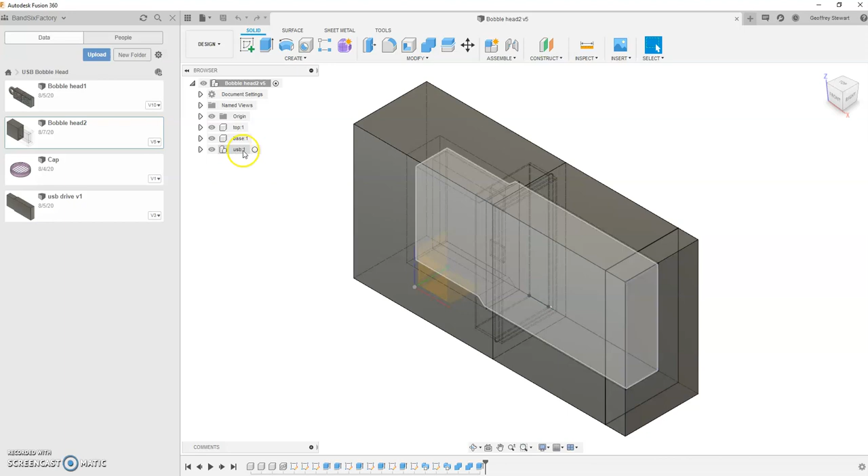So this is something I drew, so hopefully you guys are going to do something similar. I have the USB here, which is a sample I've already made, and you can download that off Lampada.

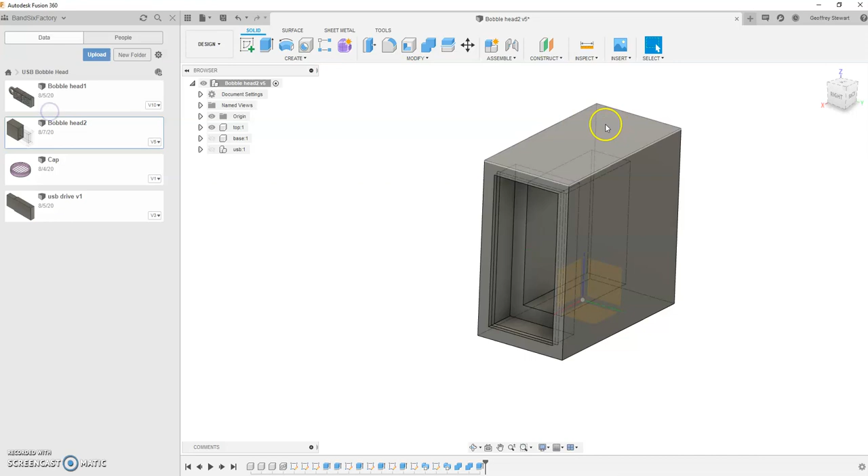Then I'm going to get you guys to design a base or a top, something like this, which is going to have a little recess in the lid, and we're going to make the base. It's going to have a little notch there at the top, so we'll make a little clicky lid.

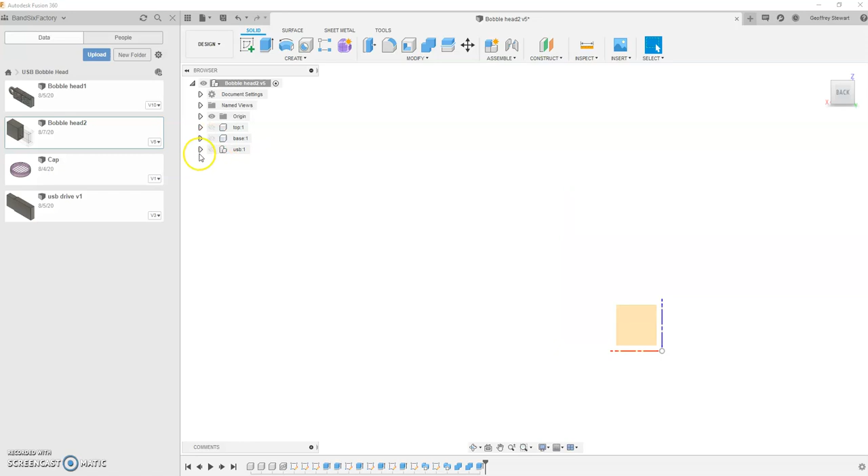Okay, so what we need to do, I'll start again. Okay guys, we're going to create a new design here, so I'll just go up here and we're going to create a new project.

So if I go back to the home, I have here all my projects here. I'll create a new project and let's call it USB.

Now for some of you guys, you might want to start designing your designs from the start. For most of you guys, you want to download off Lampada the USB drive.

So I'm just going to copy it from my other file here. If I go to USB drive, I'll just hit copy, and I want to paste it into here. And it's going to copy it across into that.

So if I go back home into USB, I have my USB drive. So I'll just drag that out onto the desktop there. Oh, I've got to first of all save it - just save it as USB stick. Once that's saved, I'll drag that out.

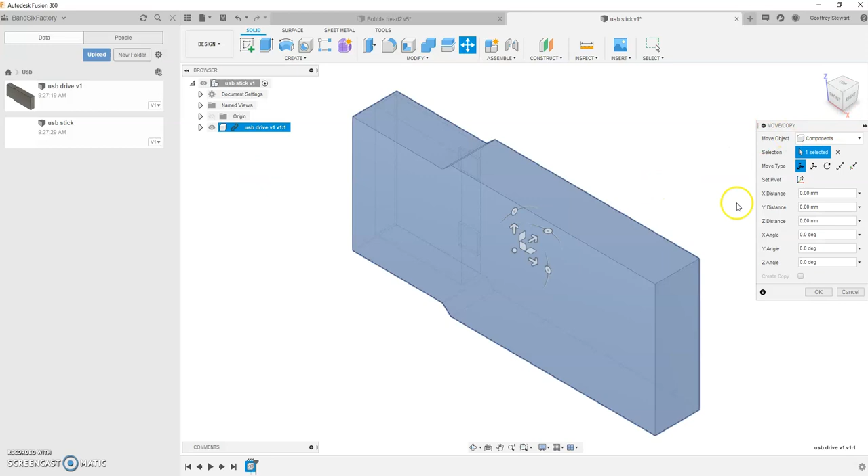Okay, now what we want to do is actually start to draw our base and our top around. So first thing I'm going to do is create some new components here - this will be our top, and this one will be our base. Okay, so I'll start working from the base to start off with.

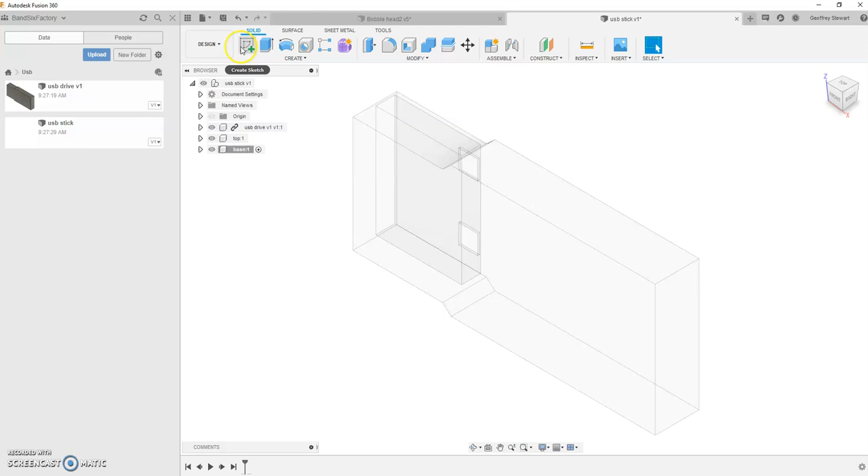Okay, so I might just start with a new sketch. Create a sketch on, I'm going to select that plane there. And I'm just going to start out by drawing two rectangles.

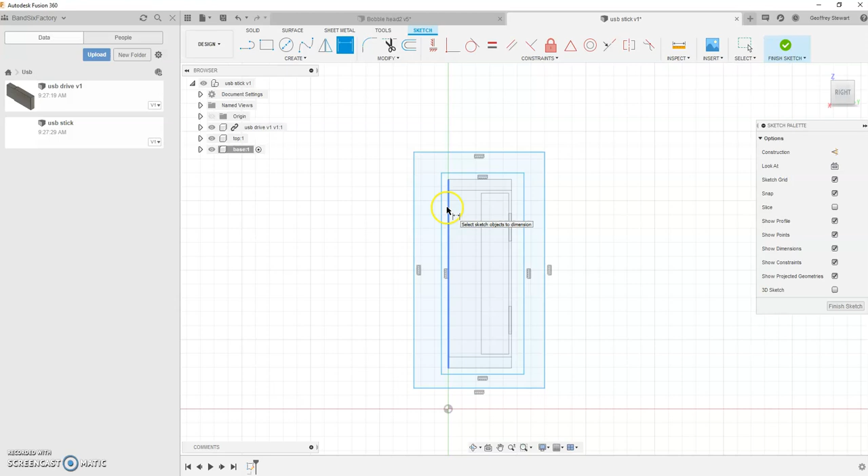Now we have to actually offset that from the USB, because what's going to happen is if we print this USB case out, we need to have some sort of tolerance in there. Otherwise we're going to get some errors when we try to print it out, because it won't fit the USB in there. So I'm just going to quickly go around and just do 0.1 on each one of these.

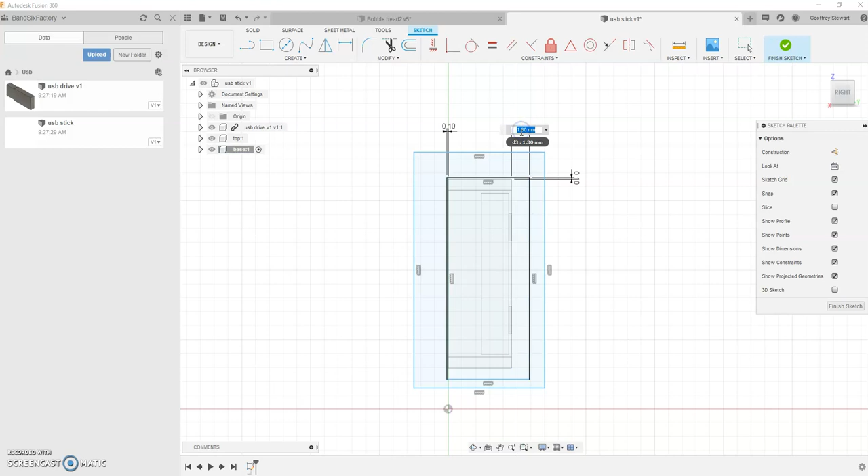Next thing, we might make a space for the next part of it. From there to there, we might make a 3mm gap all the way around.

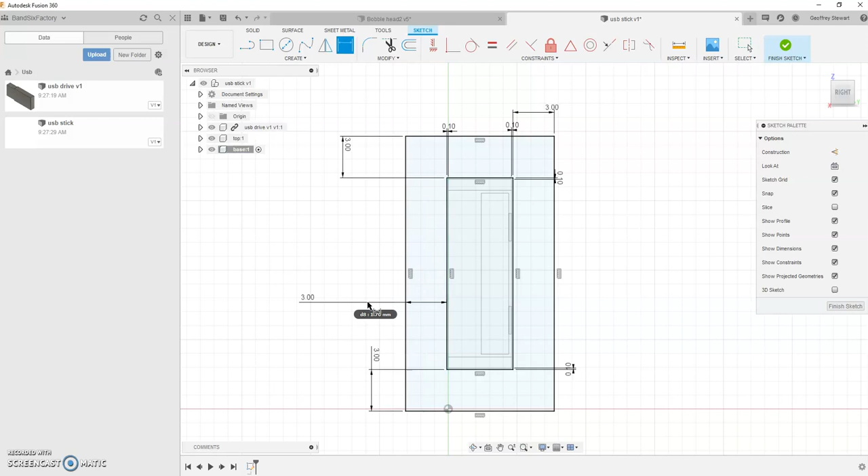Okay, finish that sketch. Now we can sort of see that we actually have a bit of an offset here. Okay, I'll just hit in the top right corner there, and we can start to extrude that part out.

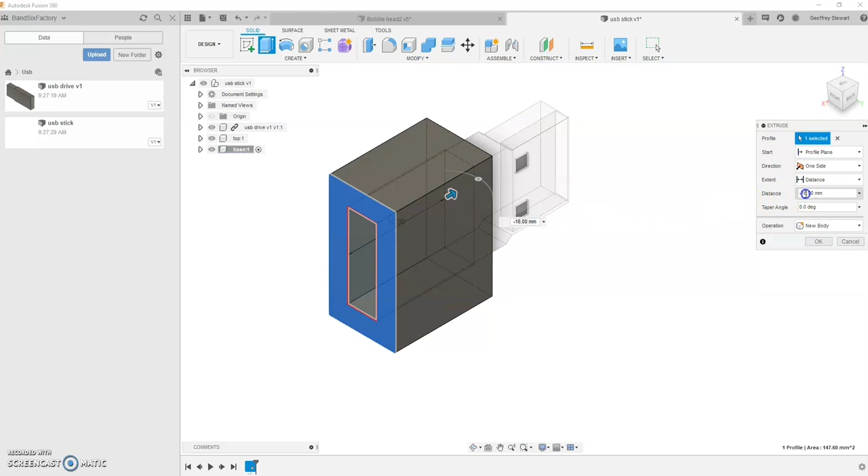So I'll select that, and I'm going to extrude it up 18mm, because we need a little bit of a gap at the top to create our recessed and our clicky lid bit.

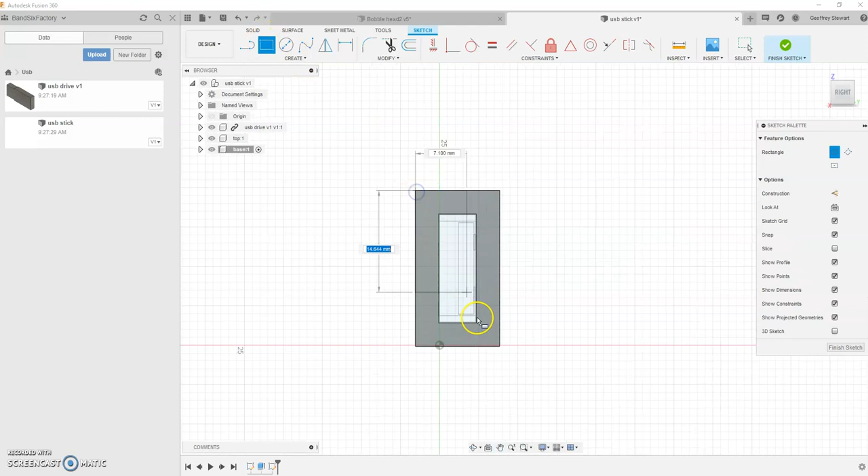Next thing, what I'll do, I'll create a new sketch on this plane here, and I'm just going to use the rectangle tool to drag around like that. Finish that sketch, and we'll extrude that face.

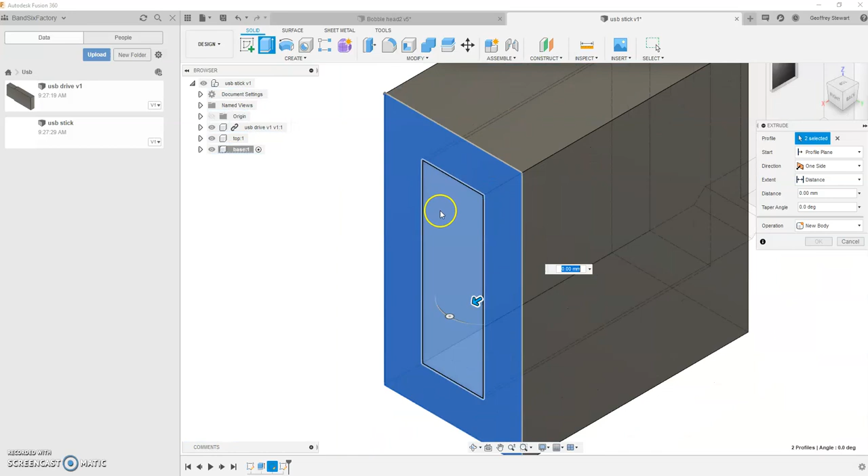Sketch, extrude, sorry. So we can extrude that out. We'll extrude that out 3 millimeters.

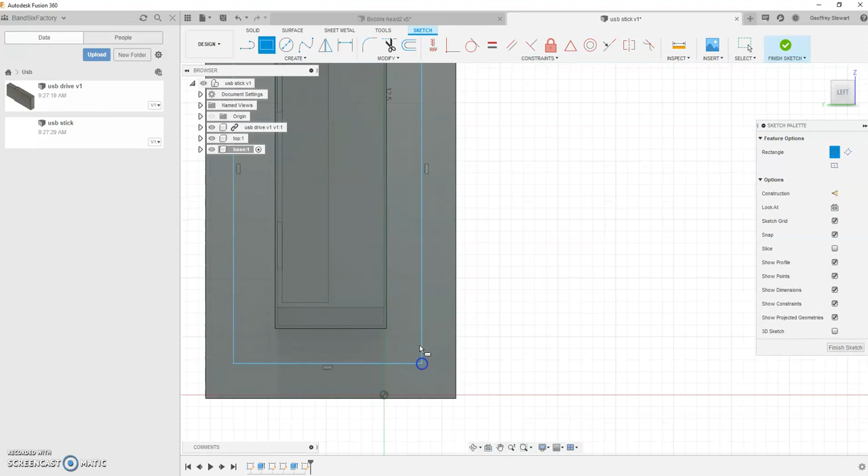Next thing I want to do is create a new sketch on the top surface here. And I'll create a little rectangle somewhere around that part there, and another one over here.

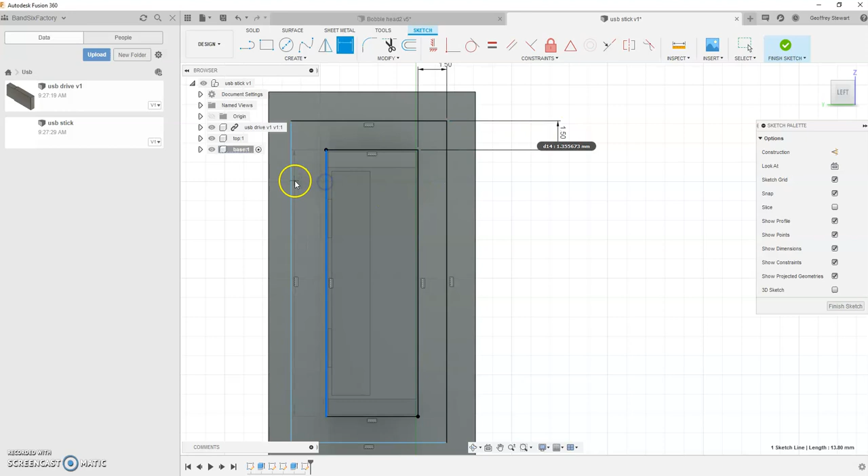Okay, and we'll just give that - we've made that dimension between there and there 3 millimeters, so we'll just make it 1.5 millimeters on each one. Finish that sketch.

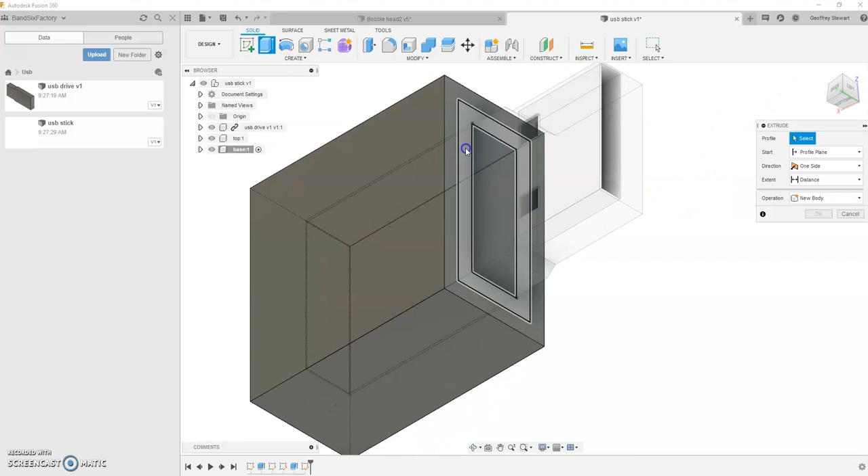And what we'll do, extrude that out now. And we're going to come out and say 4 millimeters.

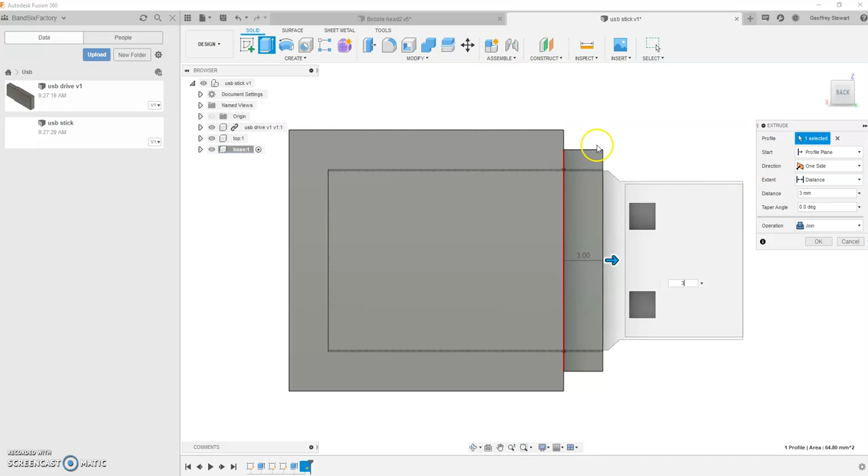Actually 3 millimeters, sorry, because we don't want it to go too far past that. So when we stick it into the USB, into the computer, we want that bit not to go too far forward.

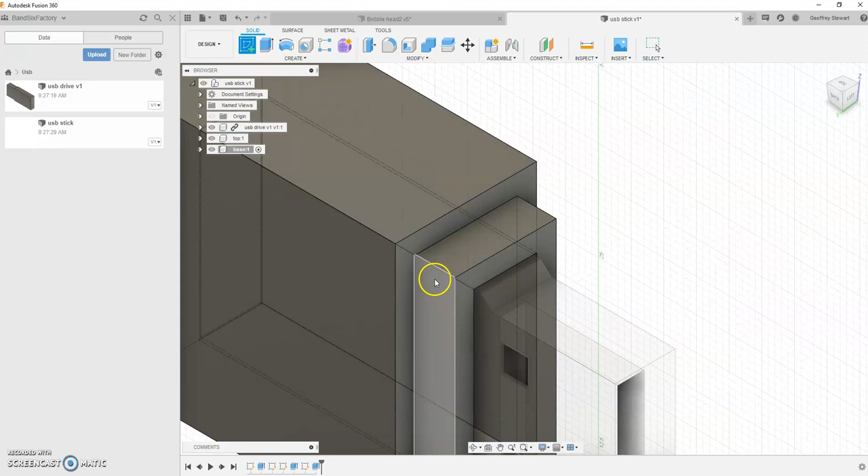Okay, I think that's getting pretty good. Next thing, we want to do a sweep around the next part. So we'll create another sketch on this surface here, right here, and I'm going to draw a little shape. We'll just create a little arc, a 3-point arc.

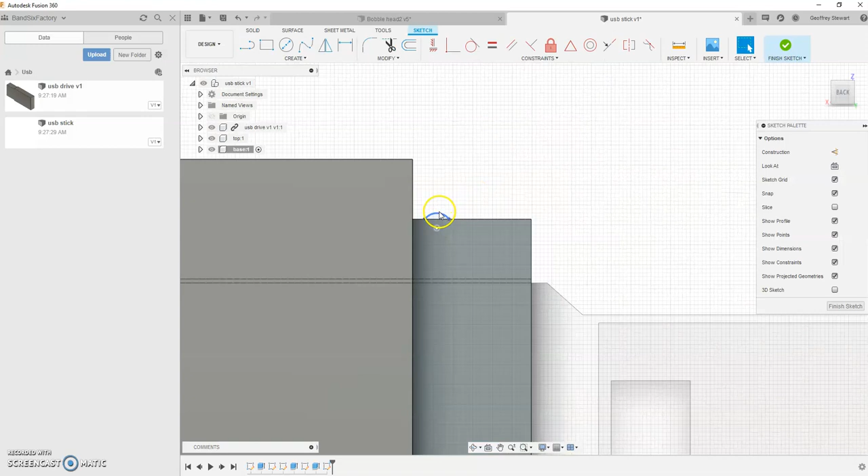Okay, so what we want to do, if we have a look at the arc, we want to go back in to check that sketch out. So I'm just going to go back and edit the sketch. If we look at that, what we actually want to have is something that's about 0.2 of a millimeter high. Now these graduations here are 0.1, 0.2, it's about 0.3 high. And we can see here it's about 0.6 long.

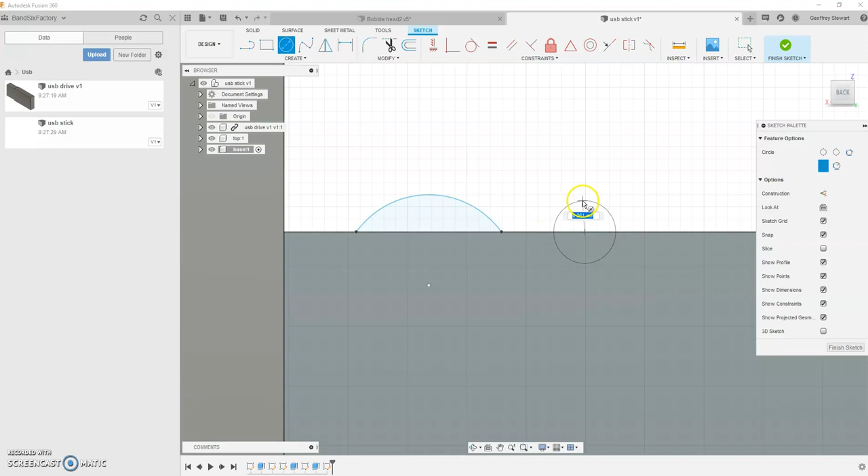Okay, now one way we can do that is just drawing a little circle like that, and see I've got it, that's actually 0.3 high at the moment.

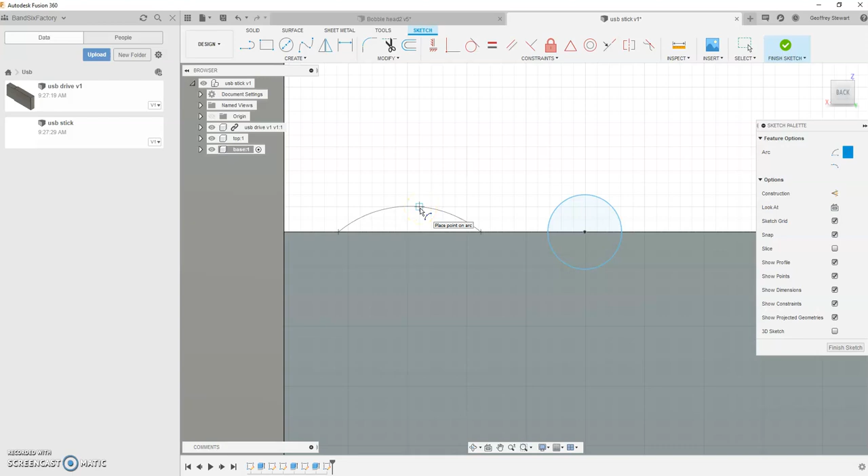So I want to redo that arc to make sure it's only 0.2 high. I'm just going to delete that and try another arc, a 3-point arc, somewhere like this, and go to about 0.2. Now the good thing about doing it at 0.2 is because when you 3D print it, the printer will actually do that. If you do it at 0.1, it won't print at 0.1 millimeters, it'll just disregard the actual bump and not print it. So you just have to be careful about that.

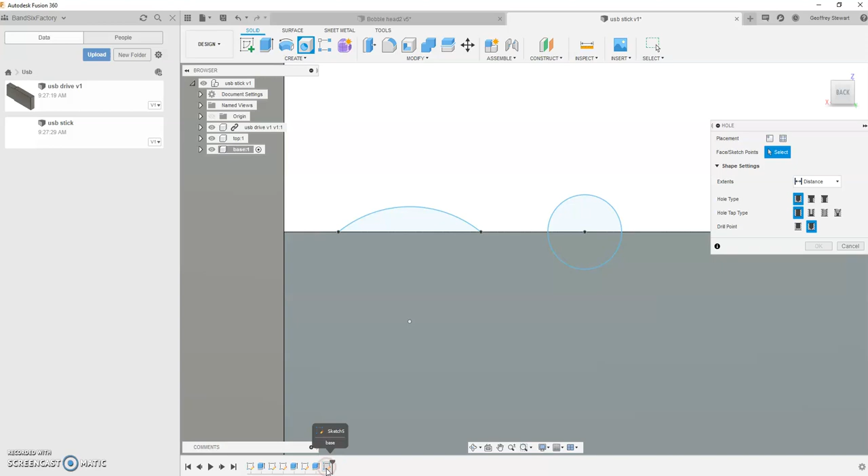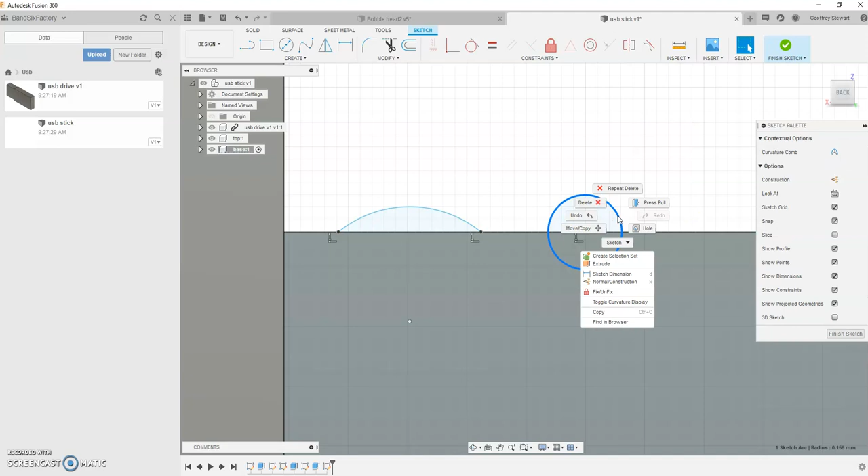Okay, I'm just going to delete that. Go back in and edit the sketch again. Go around and we're going to sweep that around.

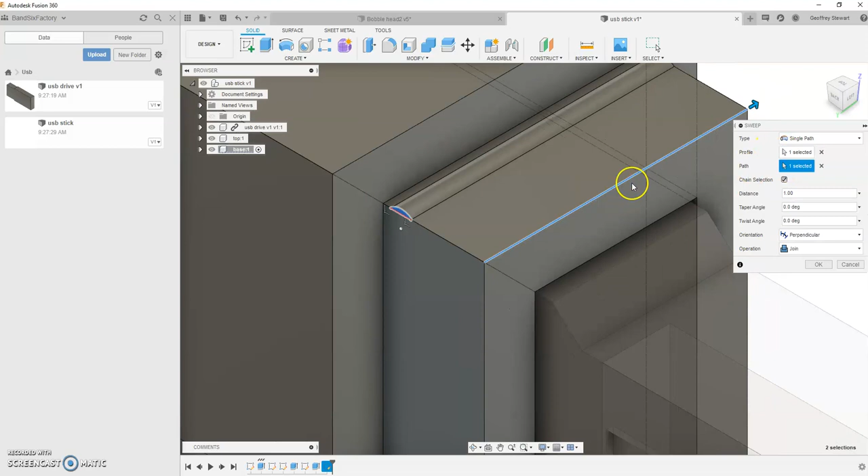Next thing we're going to do is create a sweep. So we're going to select that profile, and then select the path it's going to follow, and we'll just follow the path around the edge all the way around. And you click OK. Okay, so far that's like our base, pretty well done.

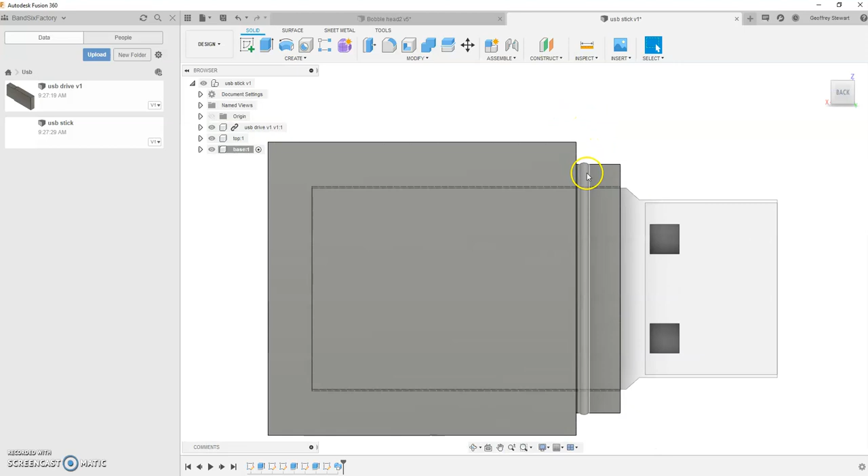Okay, the next part of this is to design the top part. But for you guys, I want to expand this and make this into your utility, so you can do whatever you like with the design of this.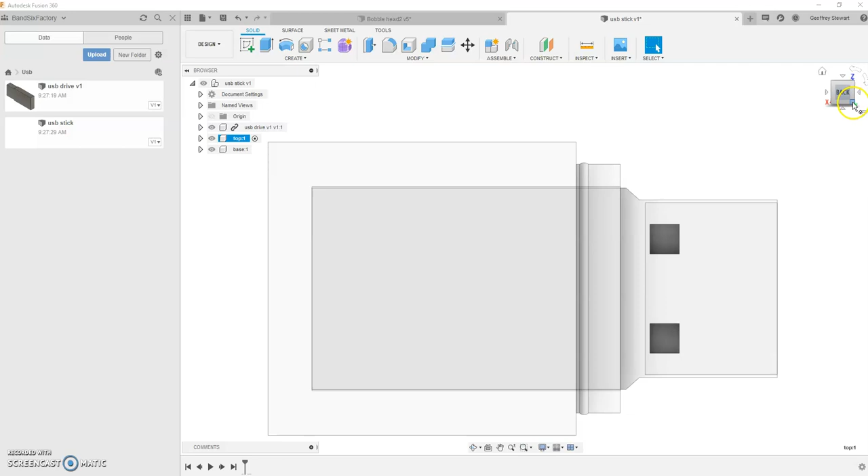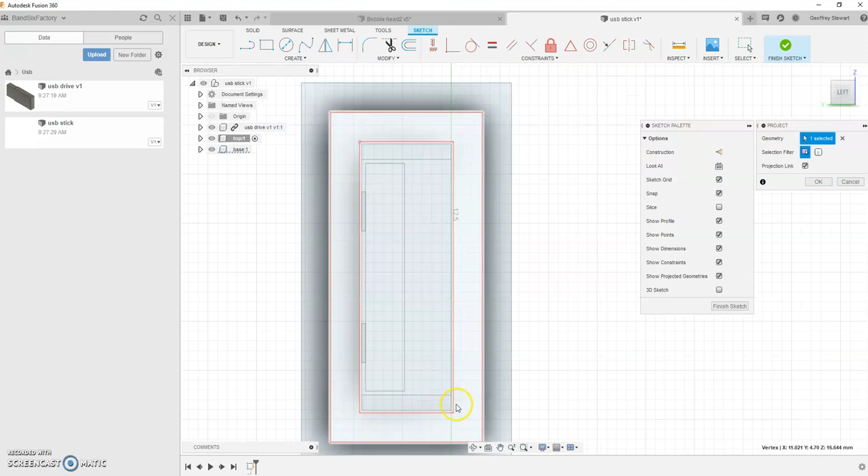Okay, so I'm just going to flick across to activate the top part of this. First of all, I'm going to select a surface to sketch off, which will be this surface here. And I'm going to do 2 rectangles. First rectangle, I'm going to hit the letter P to project. I'm going to project a little spot over there and this corner here. And I'm going to select the rectangle tool.

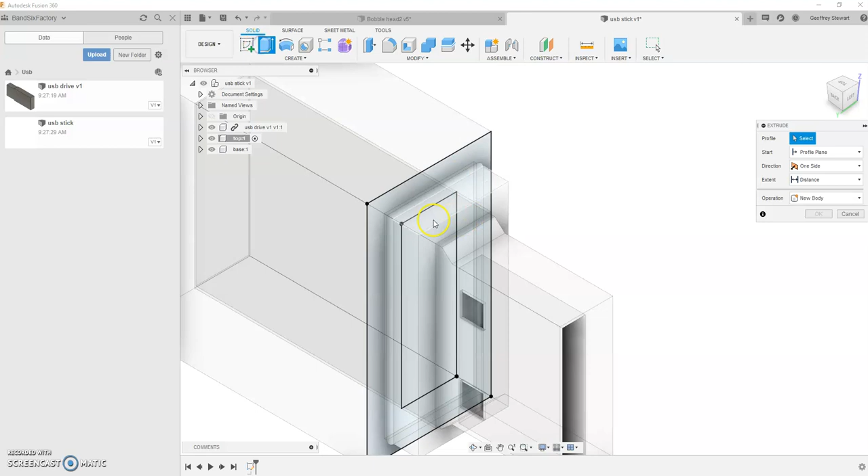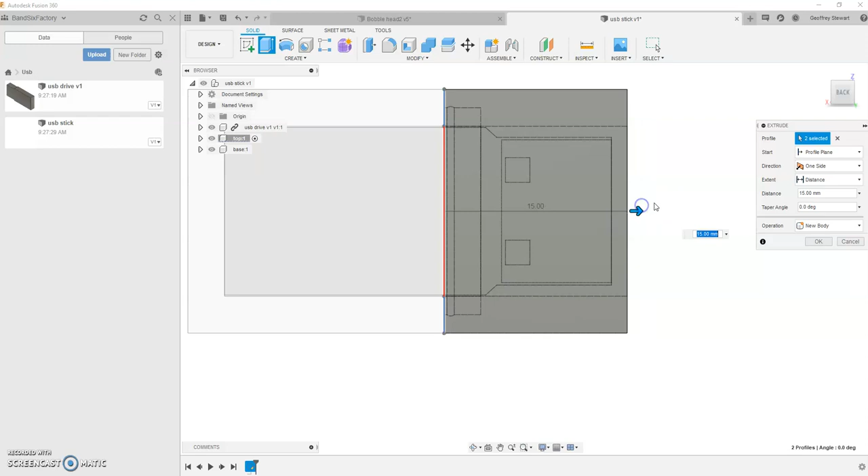Draw 1 rectangle, 2 rectangles, finish that sketch, and then I'm going to hit extrude. And I'll extrude that out, and see how far I need to go. So that's right to the very end of the USB, but we can go a little bit further. So 15 millimeters, and go OK.

Then we want to create a new sketch on this surface here. I'll just draw a rectangle from there to there. Finish that sketch and extrude that out by 3 millimeters.

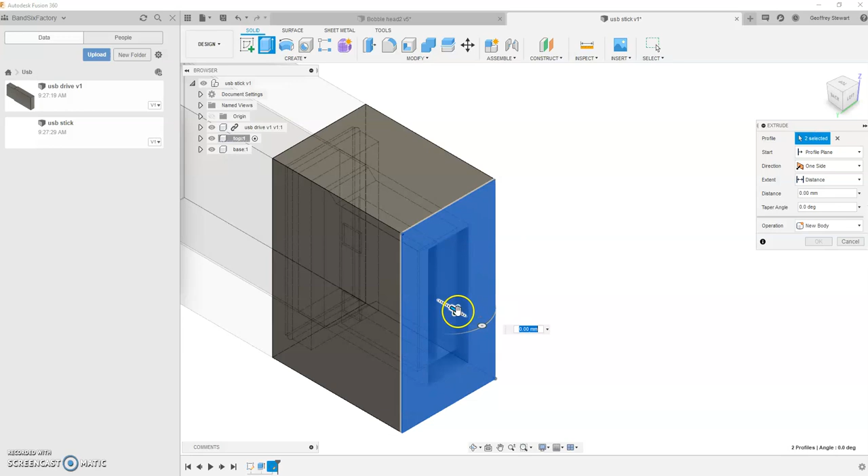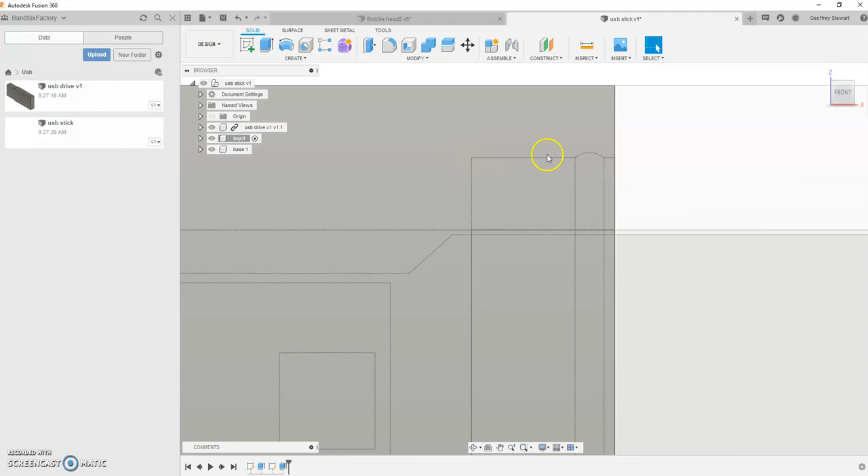Okay, now next thing we want to do is to design in here. We actually need to have this recessed part, but we also need to consider that when we 3D print it, it's not at a 0 tolerance. You need to leave a little bit of a gap there. So what I'm going to do is a sweep around that as a cutting sweep.

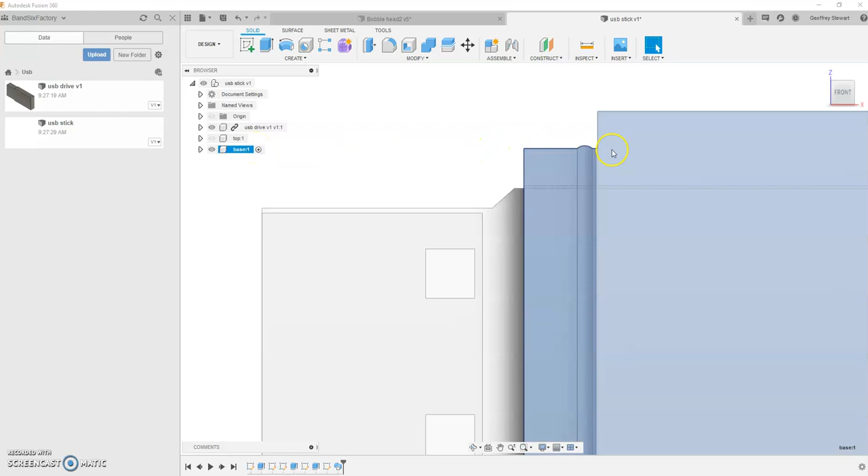So what I'll do is turn off the top and activate the base again. And I'm going to draw another shape here on this surface here. I'm going to create a shape here. I'm just going to draw a line.

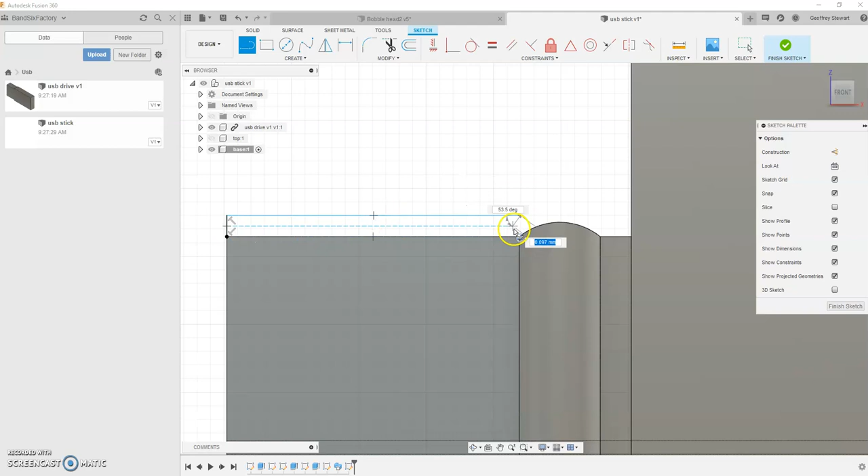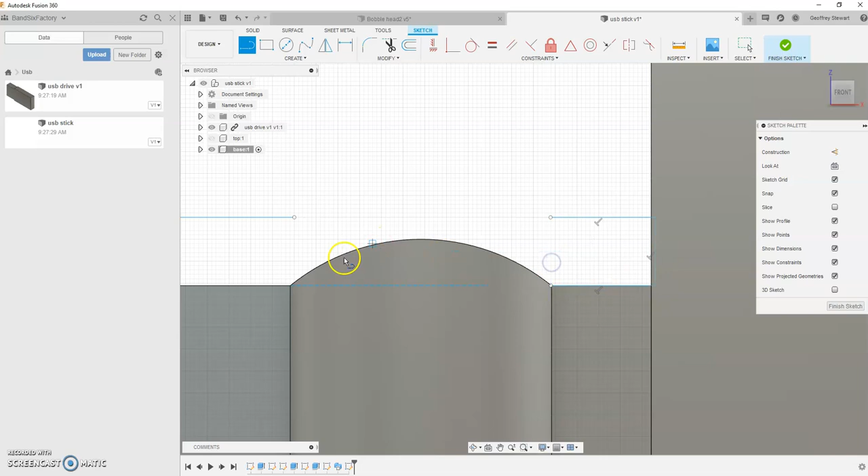Another line from, let's just draw it out here. I'll draw an arc again.

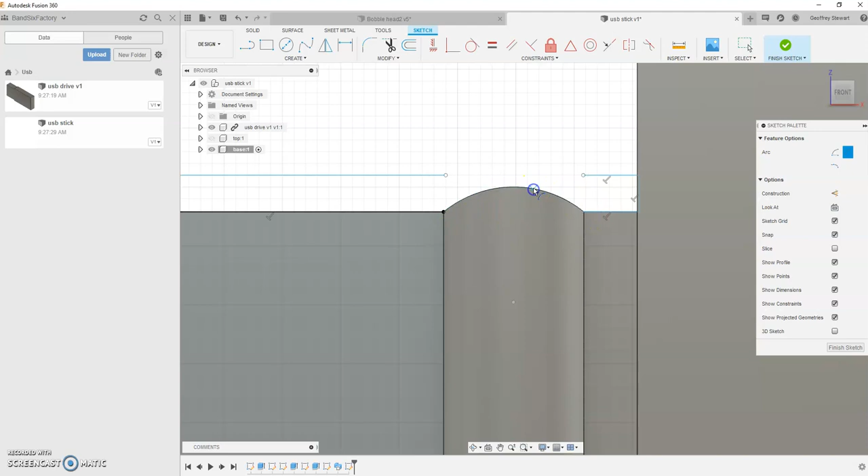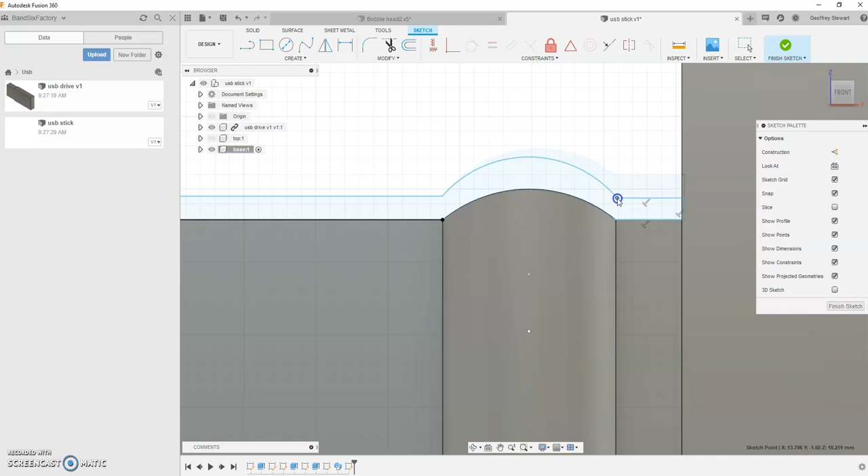Now I'm going to reduce the height of this down, so that's actually just below the top of that there. Just drag that down, so we want that to have a bit of a cut there. Okay, that's good. Finish that sketch.

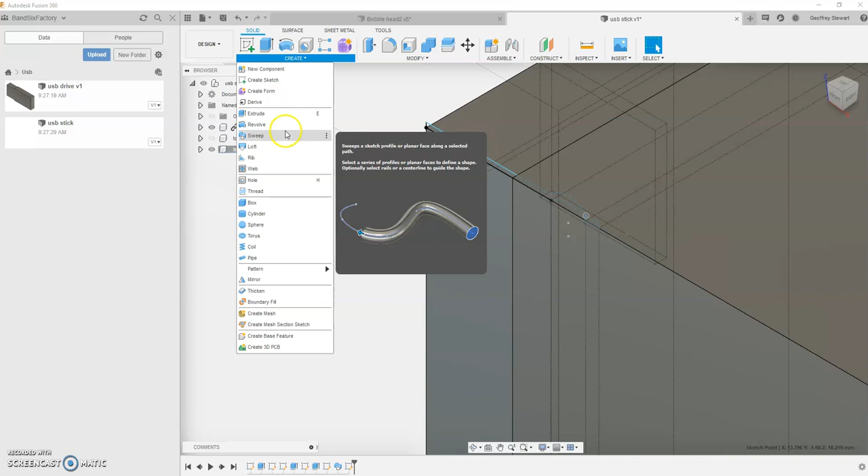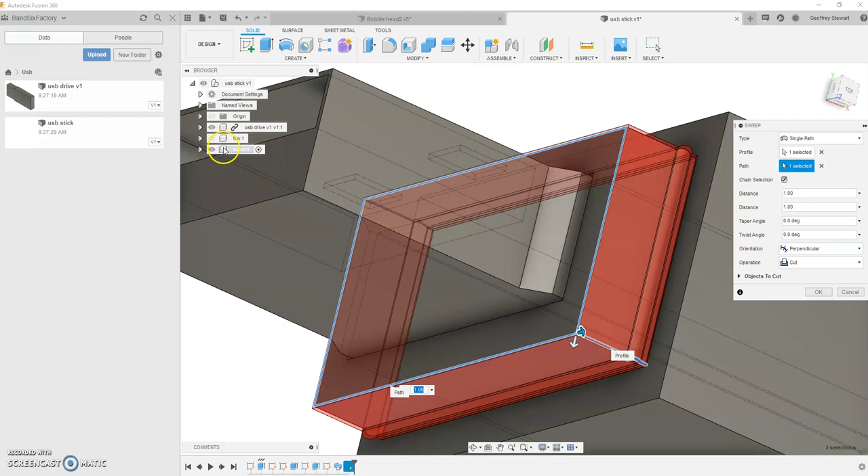Now what we're going to do, we're going to actually revolve that around. We're creating a sweep that, around. Cut. Okay, and we want to turn on the top, and that will cut a little section out.

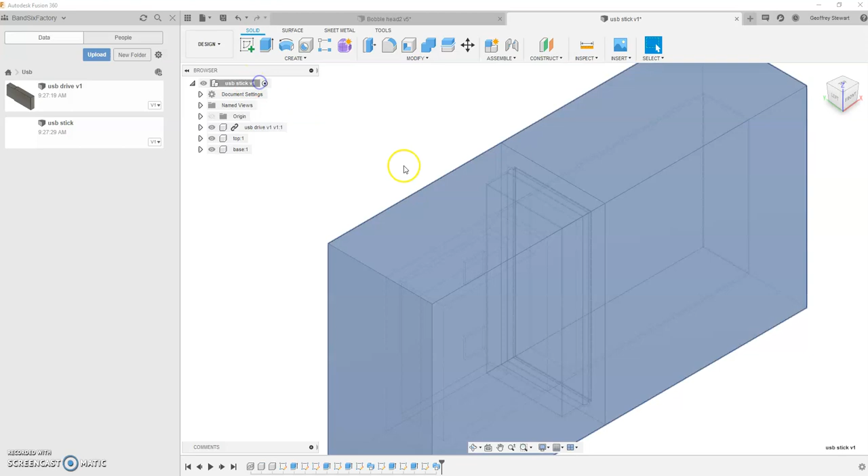So when I do an analysis now, we should have a very good result. I'll go back into the main drawing here, inspect a section analysis, and I'll just...